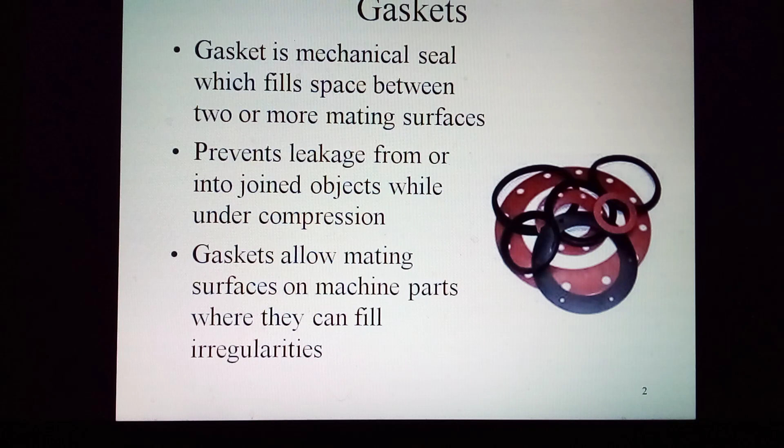Gaskets are commonly produced by cutting them from sheet materials, such as gasket paper, rubber, silicone, metal, cork, felt, neoprene, nitrile rubber, fiberglass, Teflon or plastic polymer.

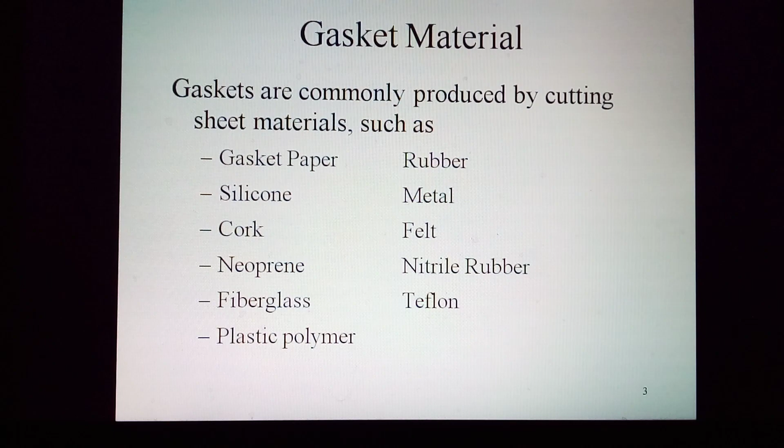Gaskets for specific applications, such as high-pressure steam systems, may contain asbestos. However, due to health hazards associated with exposure to asbestos, non-asbestos gasket materials are used when practical.

It is usually desirable that the gasket be made from a material that, to some degree, yields such that it is able to deform and tightly fill the space it is designed for, including any slight irregularities. A few gaskets require an application of sealant directly to the gasket surface to function properly. Some piping gaskets are made entirely of metal and rely on a seating surface to accomplish the seal.

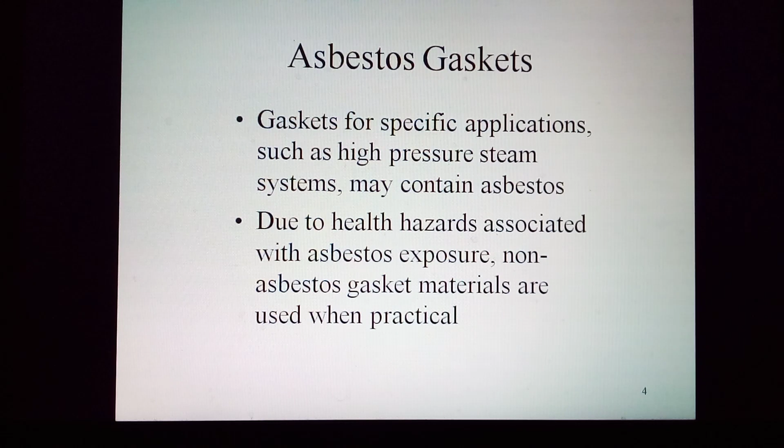Flange gasket. A flange gasket is a type of gasket made to fit between two sections of pipe flanges that are flared to provide higher surface area. Flange gaskets come in a variety of sizes and are categorized by their inside and outside diameter. There are many standards in gaskets for pipe flanges. The gaskets for flanges can be divided into major four different categories.

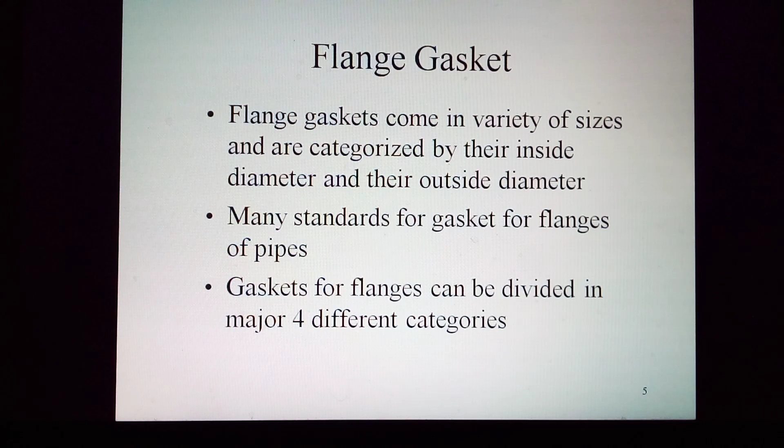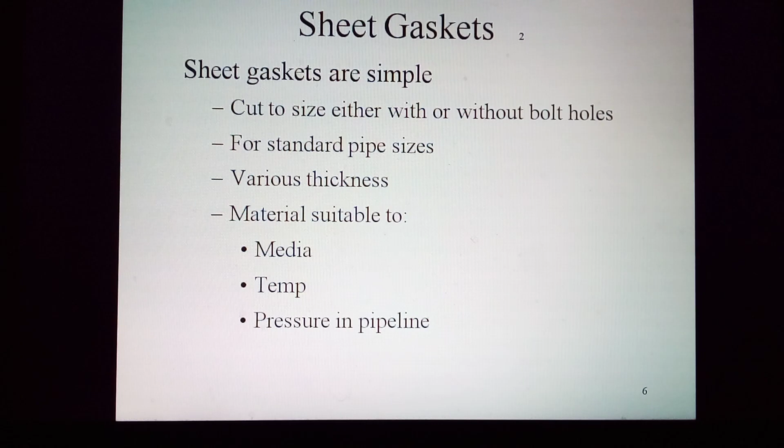Sheet gaskets. Sheet gaskets are simple. These are cut to size either with bolt holes or without holes for standard sizes with various thickness and material suitable to media, temperature and pressure of pipeline. It is a case of material punched out of sheet. This leads to a very crude but fast and cheap gasket.

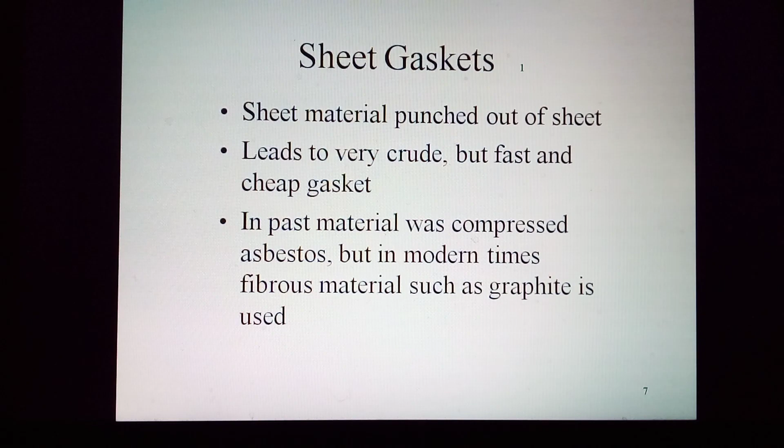In the past, the material was compressed asbestos, but in modern times a fibrous material such as graphite is used. These gaskets can fulfill many chemical requirements based on the inertness of the material used and fit many budgetary restraints. Common practice prevents these gaskets from being used in many industrial processes based on temperature and pressure concerns.

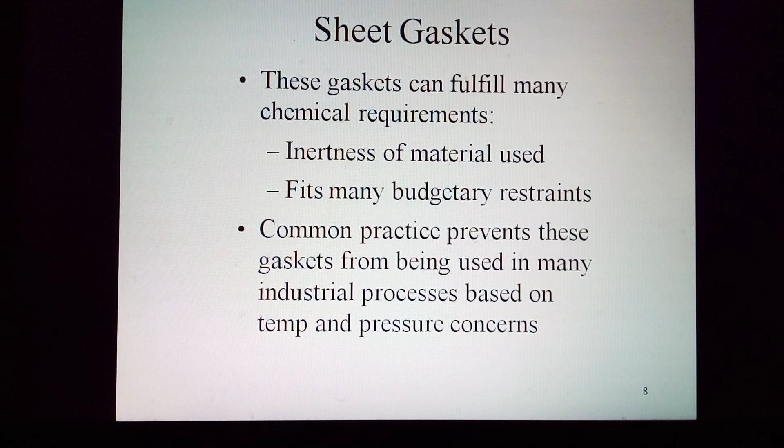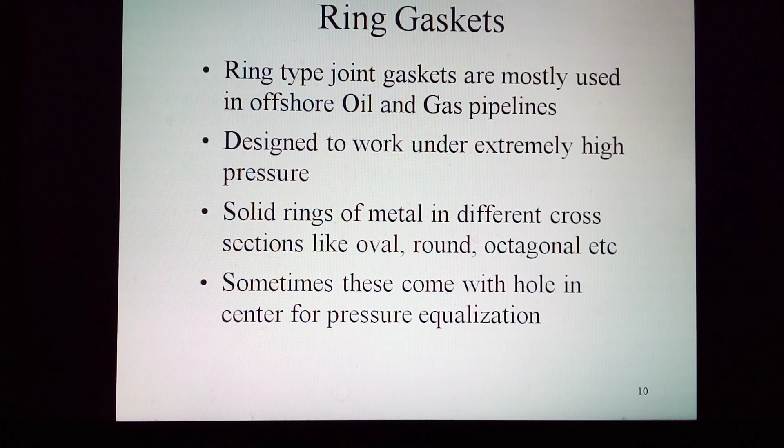Solid material gaskets. The idea behind solid material is to use metals which cannot be punched out of sheets but are still cheap to produce. These gaskets generally have a much higher level of quality control than sheet gaskets and can generally withstand much higher temperatures and pressures. The key downside is that a solid metal must be greatly compressed in order to become flush with the flange head and prevent leakage.

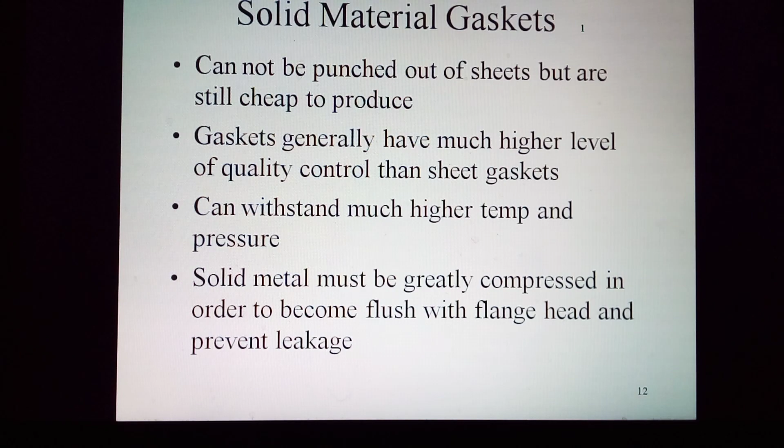The choice of material is more difficult because metals are primarily used, so process contamination and oxidation are the risks. An additional downside is that the metal used must be softer than the flange in order to ensure that the flange does not warp and thereby prevent sealing with future gaskets. Even so, these gaskets have found a niche in industry.

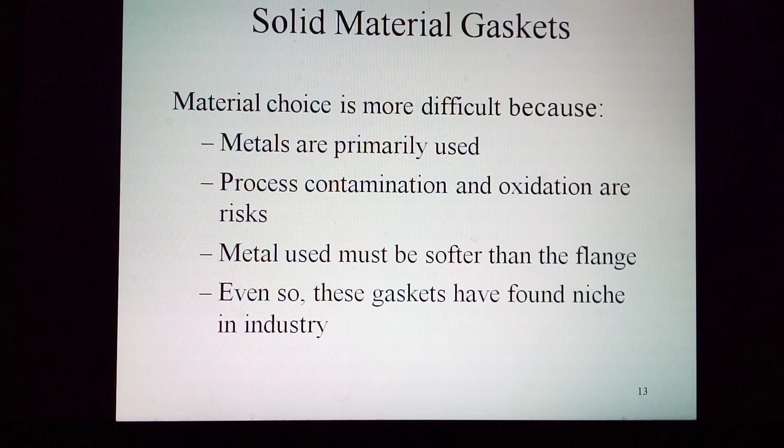Spiral wound gaskets. Spiral wound gaskets are also used in high-pressure pipelines and are made with outer and inner rings of stainless steel and a center filled with spirally wound stainless steel tape wound together with graphite and PTFE, which is formed in V-shape. Internal pressure acts upon the faces of the V, forcing the gasket to seal against the flange faces.

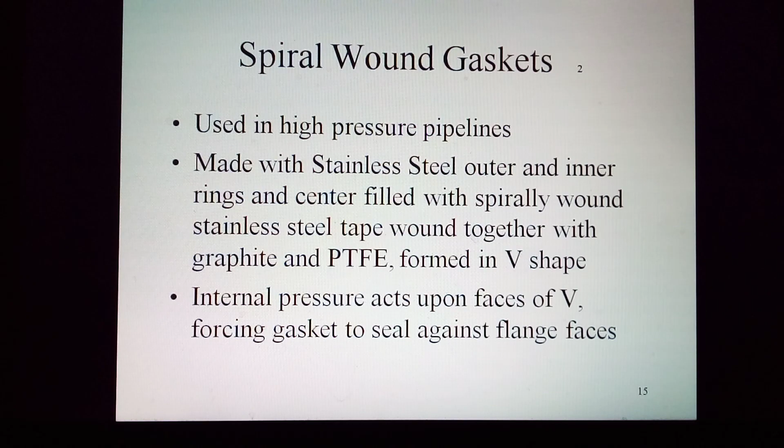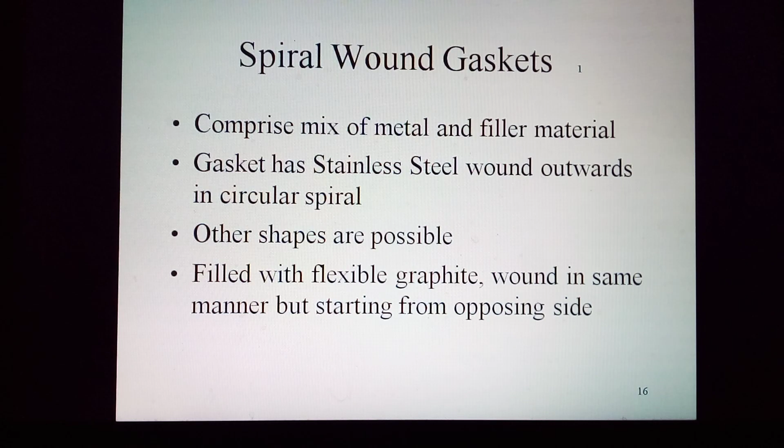Spiral wound gaskets comprise a mix of metallic and filler material. Generally, the gasket has a metal, normally carbon-rich or stainless steel, wound outwards in a circular spiral. Other shapes are also possible, with the filler material, which is generally a flexible graphite, wound in the same manner but starting from the opposing side. This results in alternating layers of filler material and metal.

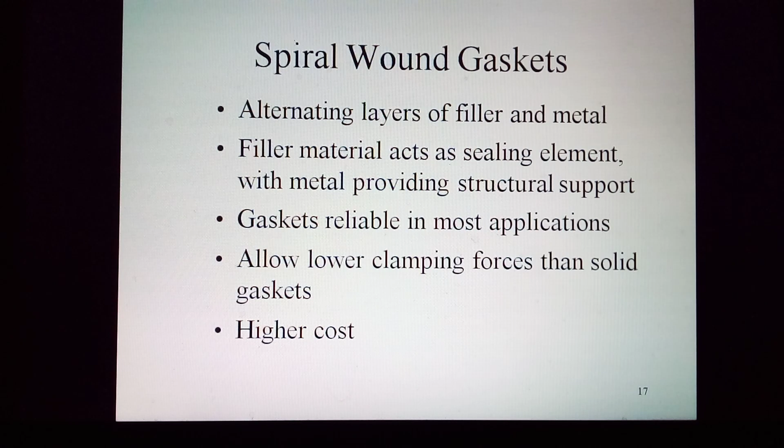The filler material in these gaskets acts as a sealing element, with the metal providing structural support. These gaskets have proven to be reliable in most applications, and allow lower clamping forces than solid gaskets, albeit with a higher cost.

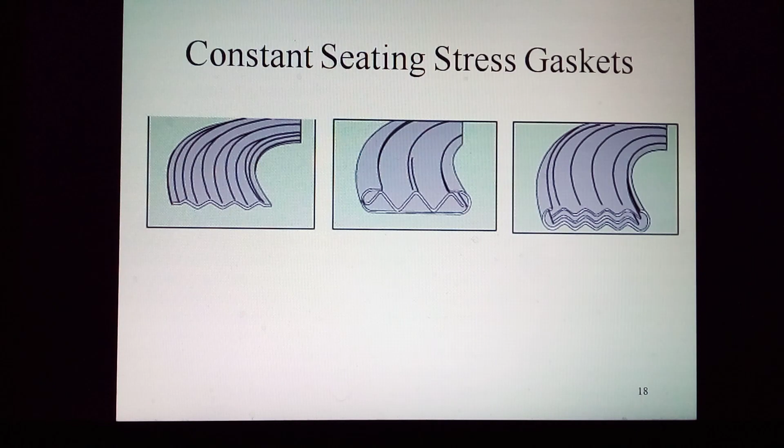Constant seating stress gasket consists of two components: a solid carrier ring of a suitable material, such as stainless steel, and two sealing elements of some compressible material installed within two opposing channels, one channel on either side of the carrier ring. The sealing elements are typically made from a material like expanded graphite or expanded PTFE suitable to the process fluid and application. These derive their name from the fact that the carrier ring profile takes flange rotation or deflection under bolt preload into consideration.

With all other conventional gaskets, as the flange fasteners are tightened, the flange deflects radially under load, resulting in the greatest gasket compression and highest gasket stress at the outer gasket edge. Since the carrier ring used in constant seating stress gaskets takes this deflection into account when creating the carrier ring for a given flange size, pressure class, and material, the carrier ring profile can be adjusted to enable the gasket seating stress to be radially uniform across the entire sealing area.

Further, because the sealing elements are fully confined by the flange faces in opposing channels on the carrier ring, any in-service compressive forces acting on the gasket are transmitted through the carrier ring and avoid any further compression of the sealing elements, thus maintaining a constant gasket seating stress while in service. Thus, the gasket is immune to common gasket failure modes that include creep relaxation, high system vibration, or system thermal cycles.

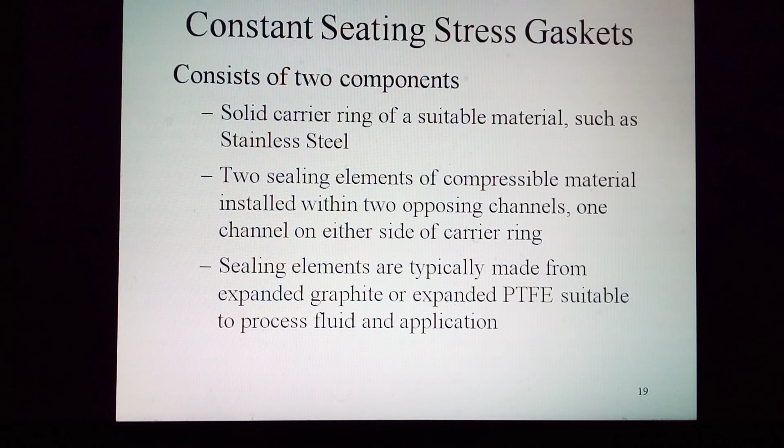Double-jacketed gaskets. Double-jacketed gaskets are another combination of filler material and metallic materials. In this application, a tube with ends that resemble a C is made of the metal with an additional piece made to fit inside of the C, making the tube thickest at the meeting points. The filler is pumped between the shell and piece.

When in use, the compressed gasket has a larger amount of metal at the two tips where contact is made due to the shell and piece interaction, and these two places bear the burden of the sealing process. Since all that is needed is a shell and piece, these gaskets can be made from almost any material that can be made into a sheet, and a filler can then be inserted. This is an effective option for most applications.

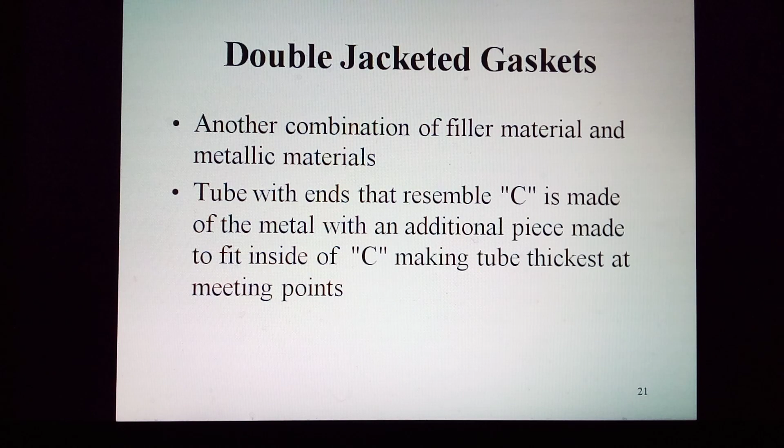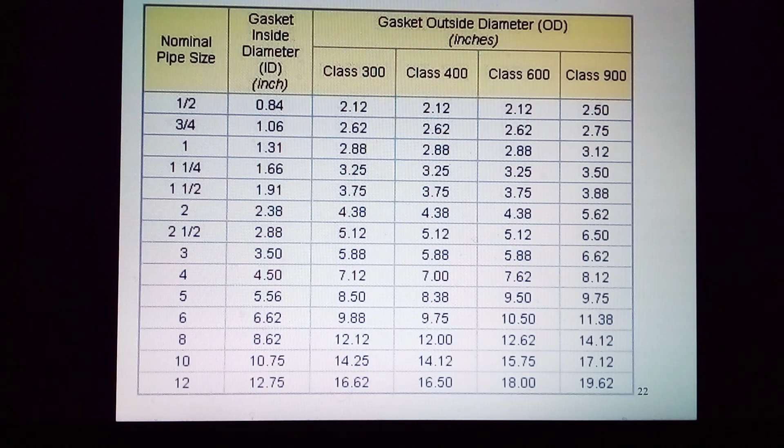This chart shows nominal sizes for gaskets. The pipe size, gasket inside diameter, and gasket outside diameter for different flange classes are given in inches. This chart gives recommended design parameters.

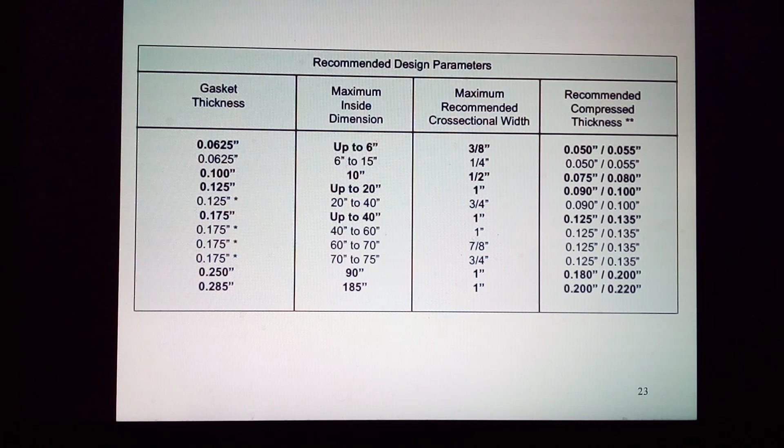Three considerations for force on gaskets. End force originates from the pressure of confined gases or liquids that try to separate the flange faces. Gasket load is the function of the bolting which applies force on the flange faces to compress the gasket and withstand internal pressure. Internal pressure is the force which tends to move, permeate or bypass the gasket.